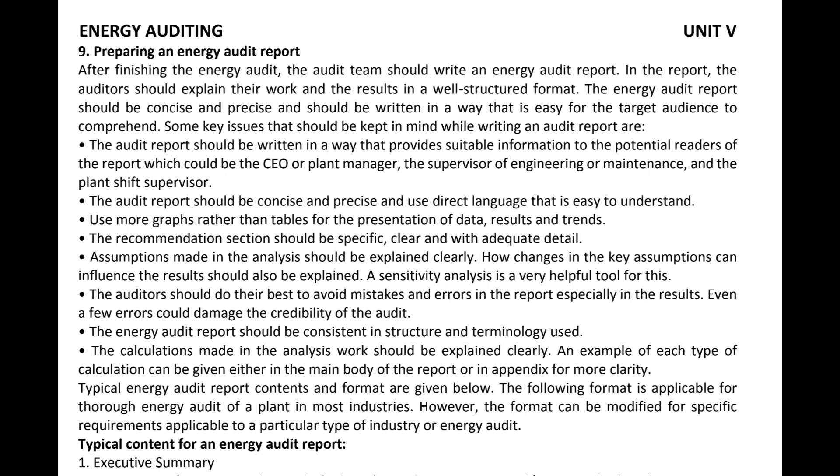Then the component of the production cost: the raw materials which are with the industry, energy components, chemicals, inventories, manpower which is there, what are the overhead charges, and others can include the government charges, etc. So next is the major energy use. What is the sector which is consuming the maximum energy? The maximum energy could be the electrical energy.

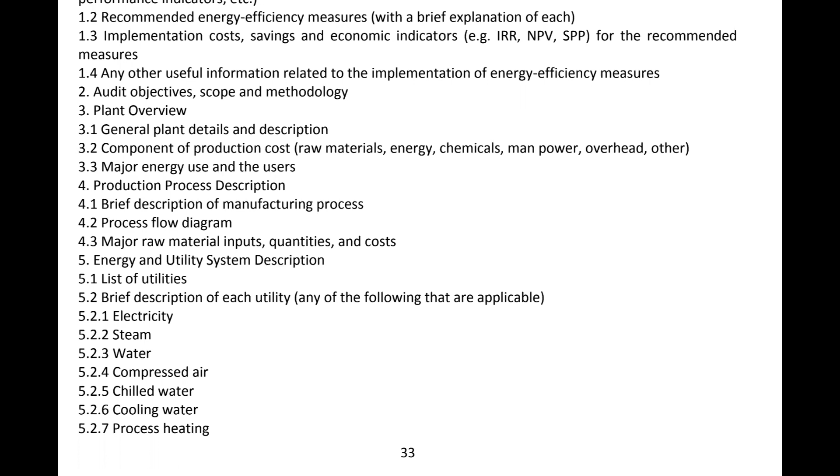And then the production process description, what is the process which is being followed. Then the process flow diagram, how this process is carried out from one step to another. It is necessary so that when we know the flow of the process, then we can analyze where saving is being done. Okay. Then major raw materials, inputs, quantities, and its cost.

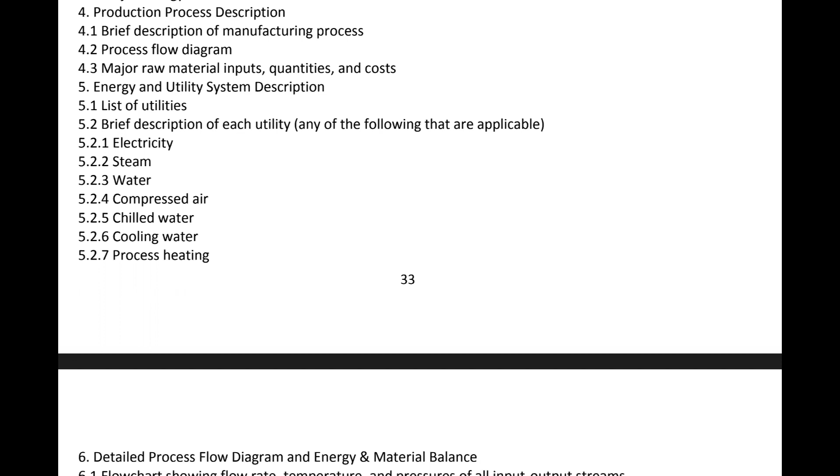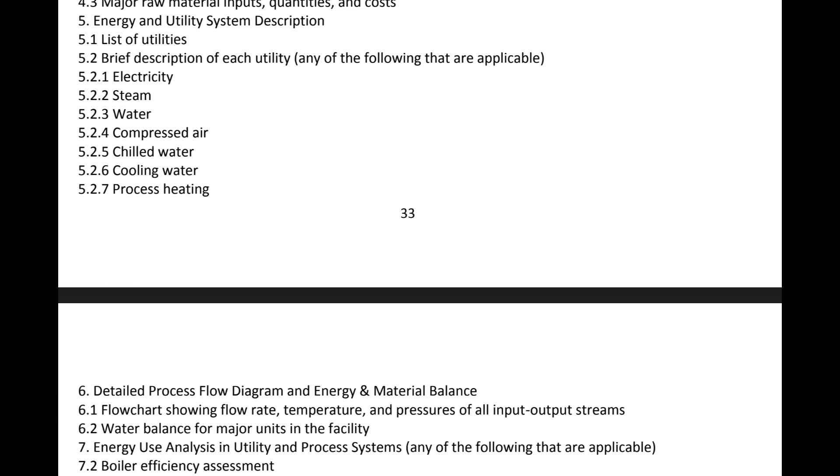Energy, utilities, and its systems description, where energy is being utilized, what is the list of those utilities, and brief description of each utility. These utilities can be the electricity, steam, water, compressed air, chilled water, cooling water, process heating, etc. Because each of these things may use electricity, and hence there is a scope of energy saving in that.

Okay. Then the detailed process flow diagram and energy and material balance, flow chart of flow rate, temperature, and pressure of all input output streams. If an industry is working in a particular country, first of all, the geographical conditions which are prevailing, the topology of the industry, all these affect the desired temperature and pressure conditions.

Okay. If the ambient temperature itself is more, then the energy which is being utilized to raise the water to steam will be less. Same is the condition for the pressure. So all these flow charts that include input and output streams are calculated: what is the input pressure, what is the output pressure, or what is the energy which is being utilized to raise that pressure. Okay. Water balance for major units in the facilities.

Next is the energy use analysis in utility and the process system. This system could include the boiler efficiency, furnace efficiency analysis, cooling water performance, how it could be the cooling of water or the condensate or the energy extraction from them. Refrigeration system performance, if we are having any refrigeration system, or we are dealing with the cold storage industry, or some vaccination industries, or any other industry which requires the chemicals or accessories to be kept at freezing temperature. So what is the system which is being adopted there, whether it is properly insulated or not.

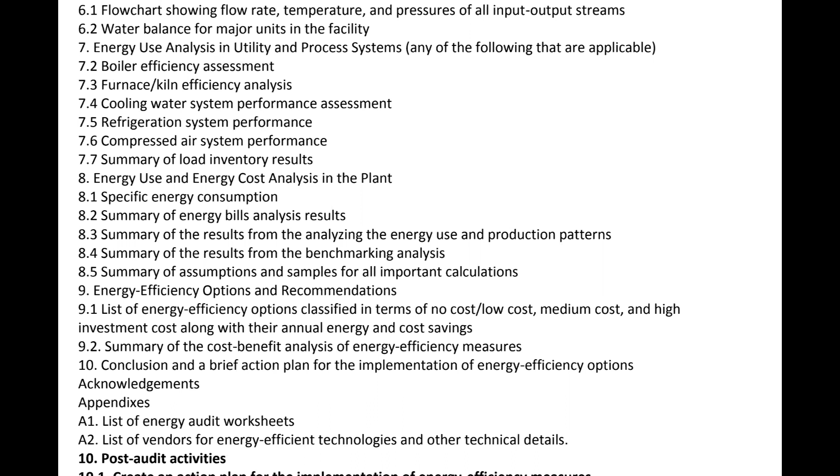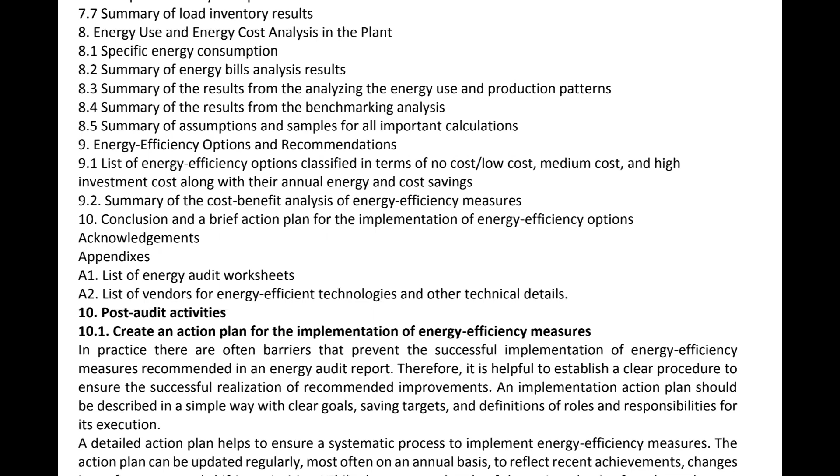Compressed air system performance, and the summary of the load inventory results. We have to summarize the electrical load which is being used. Next is the energy use and energy cost analysis in the plants. It includes the specific energy consumption, energy bills analysis, because sometimes it may happen that the energy utilization is same, but the government rules are changing for the industrial sector, so the bills may go up or down depending upon the government regulations time to time.

So energy use and the production pattern is to be studied, and the summary of the results from the benchmarking is to be taken care of, what benchmarking we are going for. For example, if we are going for the international standards, it may require more quality testing. Okay, so if that is there, then we have to be more specific with the machinery which we are having, and more skilled persons. So all these factors will affect the costing. Okay, so that is to be taken care of. Then assumptions and the summarization of that is to be there.

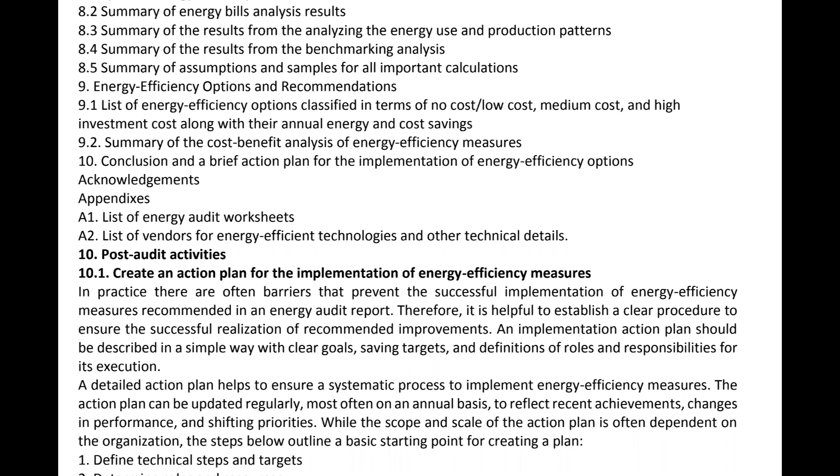Energy efficiency options and its recommendations. List of the energy efficiency options that can be classified under no cost or low cost or medium cost or high investment cost. All according to the cost priority is to be summarized. Then the cost benefit analysis is to be done, and energy efficiency measures are to be listed. Conclusion and a brief action plan is to be included. Okay, we have discussed everything in the report, but now what next?

Next is the implementation of the energy efficiency options, what should be the energy action plan for those options. Because if we are going for energy saving, we will not reach the desired energy saving or cost saving in a month or two. So there must be an action plan. Okay, we will meet the target for first quarter, say 30%, then for next quarter we may achieve 50% saving, and so on.

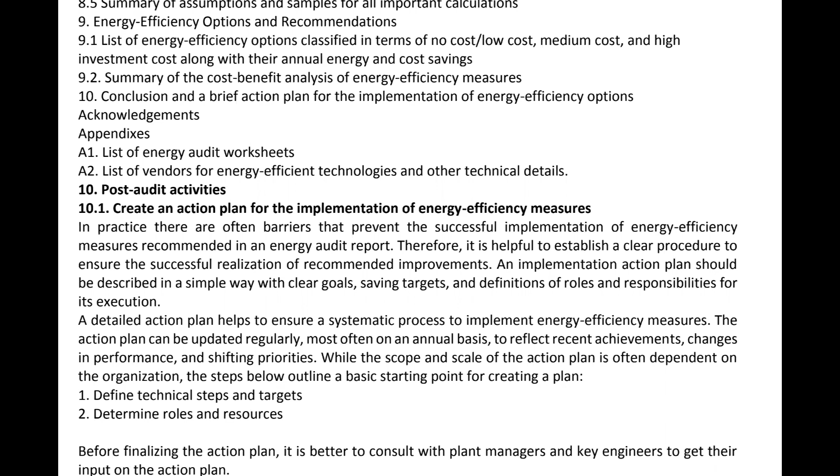Okay, then the acknowledgements and appendix is to be given, and the appendix may include the list of the energy audit worksheets. It may include the calculation part and list of the vendors of the energy efficient technologies and other technical details. Because when we are mentioning the action plan, you have to follow these energy efficiency measures. For example, if we are talking of illumination, then the recommendation may include that we have to use more natural light, color rendering is to be taken care of.

But if we are suggesting hardware, that we have to install the motion sensors, light sensors, or proximity sensors for illumination tracking, then the appendix should include the list of the vendors from which the energy efficient technologies and hardware can be purchased.

That is to be listed, although it is not binding on the company or the industry to approach them, but it is desirable to list them. If they are getting some other vendors from which they are having good liaisoning, they may opt for them. But if they are not having such liaisoning, then they may try these tried and tested vendors which are recommended by these auditors. Okay, so this is the desired report.

Now the post-audit activities: after this report, what are the activities that are to be carried out by the industry. First of all, they should create the action plan for the implementation of energy efficiency measures. It should have clear goals, saving targets, and definition of roles and responsibilities for its execution. What we are going for in this quarter, what are our goals, how we are going for the energy saving or the cost saving.

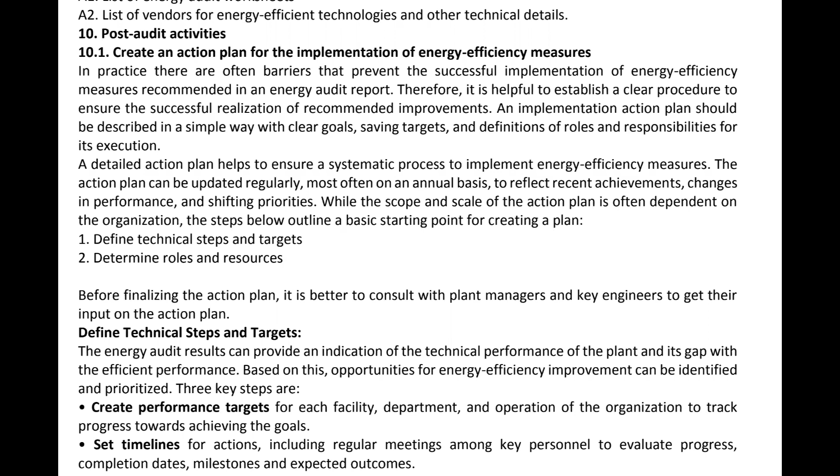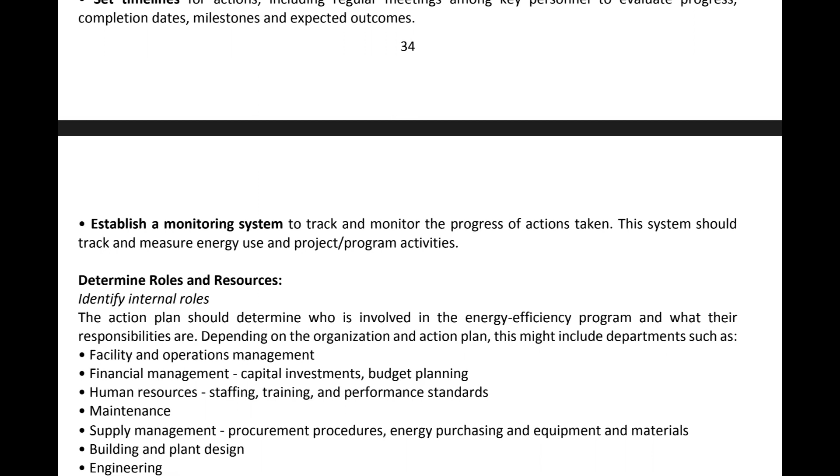Then the timelines are to be set: whatever energy saving is desired, it should include the expected outcomes and how we are going to achieve them. That can be monitored only if we are setting those timelines and establishing the monitoring system, so that we can check: this was the target, and how far have we met our targets. Next is determining the roles and the resources.

Roles can be internal roles which can be given by the works manager. It could be financial management, the financial departments going for capital investments or budget planning; human resources and staffing, which could be overstaffing, or training if we need advanced training for the advanced equipment to be purchased; performance standards, quality standards; and the maintenance department, what inventory we have to keep.

Similarly, facilities and operations management, building and plant design: if some minor changes or renovation in the building design may lead to energy saving, that is to be done. Similarly, building engineering or the production department, communication, marketing: maybe we are going for more advertisement in audiovisual mode, which can be reduced, or internet marketing; environment, health and safety issues. These are the internal roles to be given to internal members.

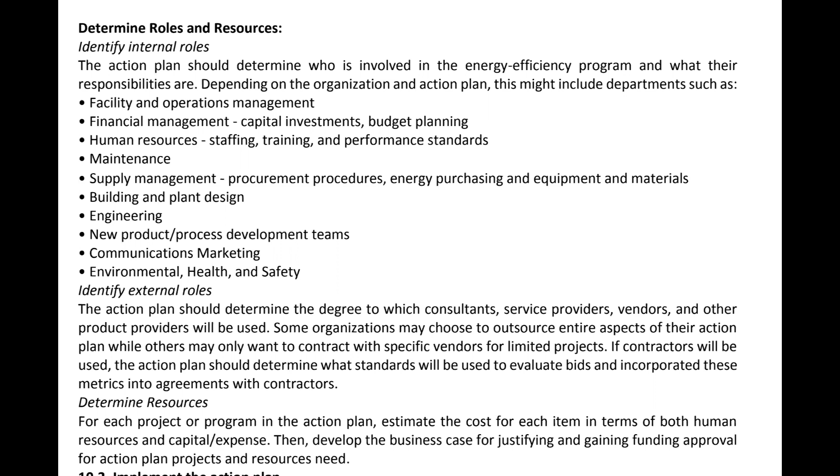Similarly, external roles: if we have to go for any consultants, service providers, vendors, or other members outside the industry, and the standards, bids and metrics are to be clearly defined, what standards we are going to follow. And also we have to determine the resources, human resources as well as hardware or technology resources, and how we can justify the funds which are available for that.

Okay, we will stop here at the moment.